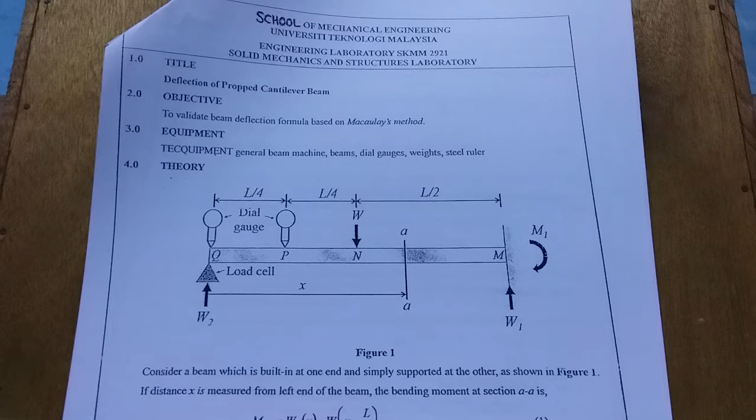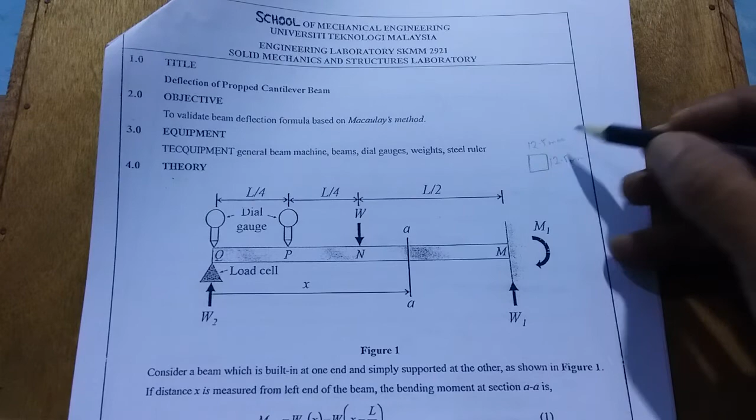Experiment equipment consists of the TecQuipment general beam machine. Beams, we have two beams to test. Beam number 1, aluminum beam, square shape bar, 12.5 mm multiply 12.5 mm. And beam number 2, stainless steel beam, rod shape, 12.5 mm diameter.

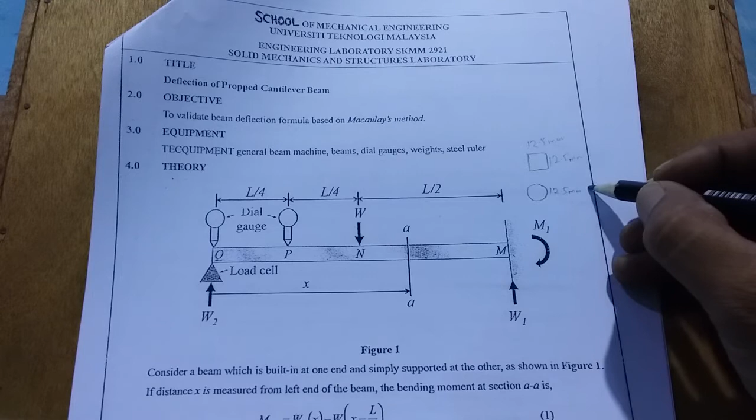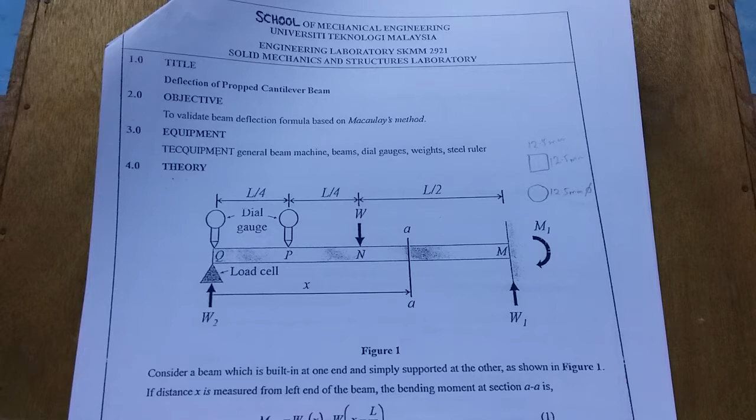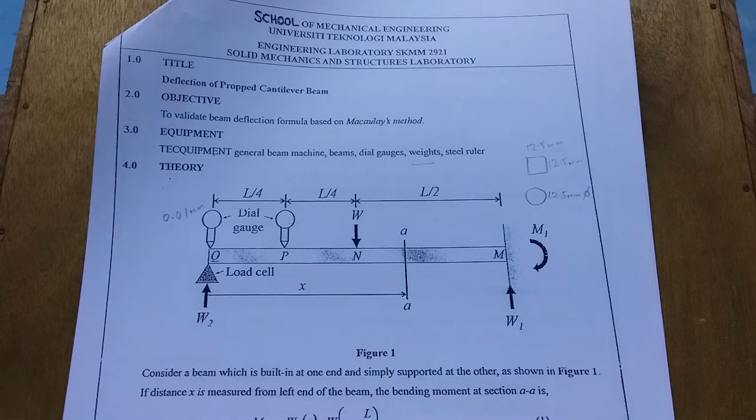Other equipment, dial gauge, two, at position Q and P. Each scale 0.01 mm. Weights, we have 5 units of weight. Each weight 200 gram. Steel ruler to measure distance L/2, L/4 and L/4. And W2 load cell, each scale 1/5 Newton.

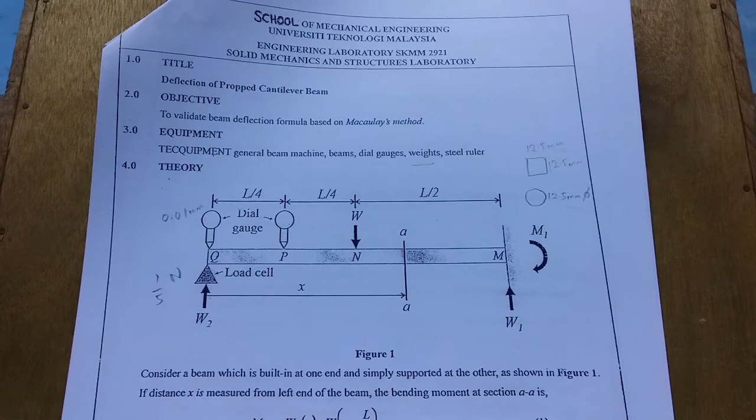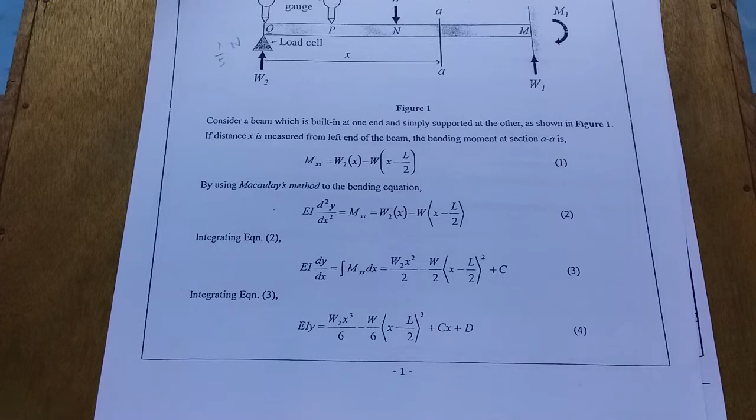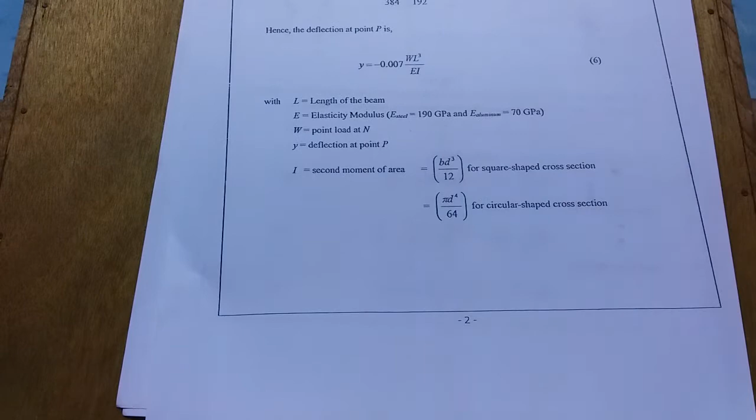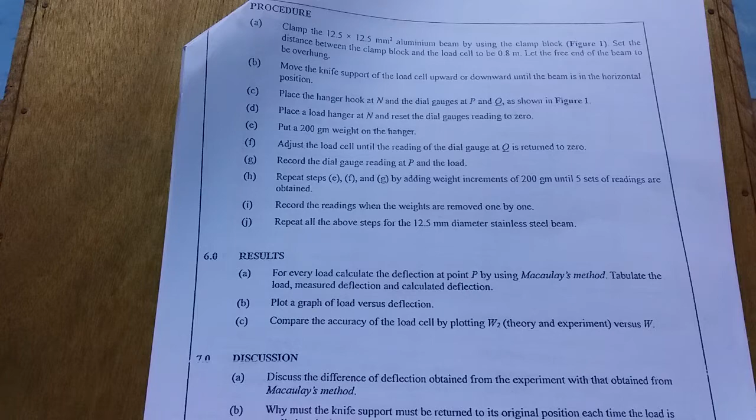The rest of this lab sheet at page 1 is calculation. Page number 2, calculation. Page 3, number 5, procedure, how to run the experiment step by step until finish. And number 6, 7 and 8, results, discussion and conclusion. You do it after the test is done.

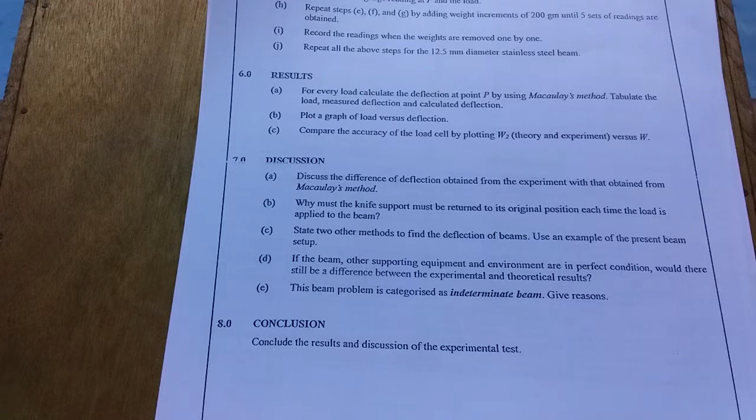Last page, table for the experiment of deflection of propped cantilever beam. Table number 1 for aluminum beam, 12.5 mm multiply 12.5 mm. And table number 2 for stainless steel beam, 12.5 mm diameter.

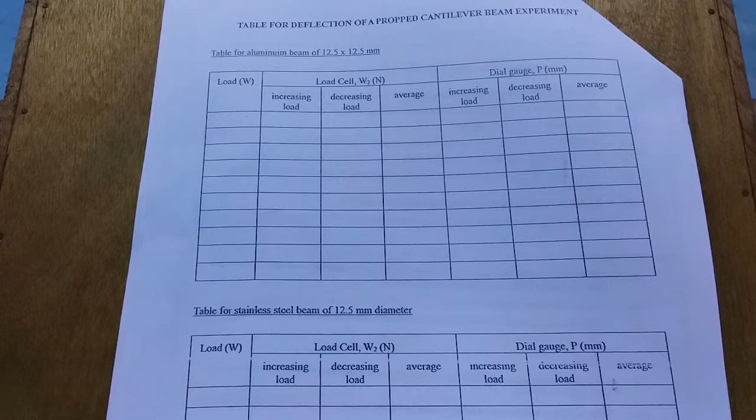This is the actual equipment of deflection of propped cantilever beam. This equipment consists of the TecQuipment general beam machine. Beams, we have a stainless steel beam, diameter 12.5, and then aluminum beam 12.5 multiply 12.5 mm. And then dial gauge, we have two. Weights, 5 units of weight, each weight 200 gram.

Steel ruler, okay, and others, load cell, this one W2 load cell, and then clamp hook, this one clamp hook, this one clamp block, then this one also clamp block, and then load hanger, this one load hanger. That's all for the equipment.

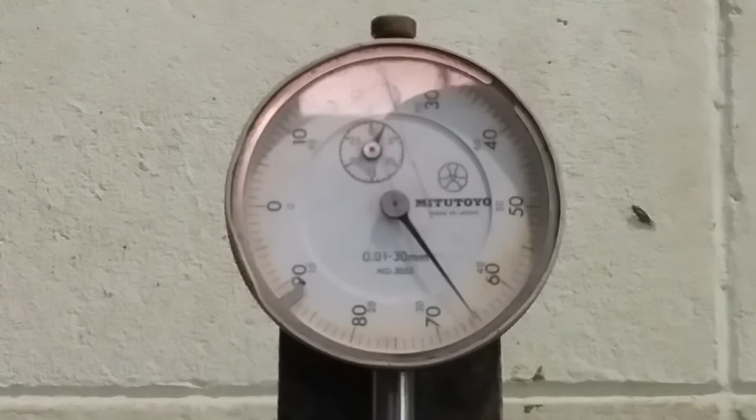Right now we learn how to read the dial gauge and load cell. Okay, dial gauge. This is the dial gauge. Dial gauge has two scales, big scale and small scale. In this experiment, our main focus is on the big scale. On the big scale, one scale equals 0.01 mm. Let's say our needle starts from 0.

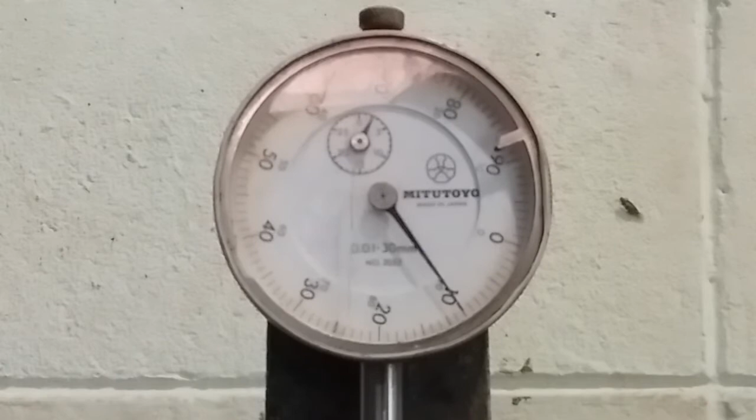Our needle starts from 0, and then it's measuring till 10. Means 10 scale. 10 scale, you are going to multiply 10 scale by 0.01. The actual reading for the dial gauge right now is 0.1 mm. 10 scale multiply 0.01 mm equal to 0.1 mm.

And now load cell W2. Load cell has a knife support and scale on the spindle. When you rotate this spindle anti-clockwise, the knife support will move upward, and if you rotate the spindle clockwise, the knife support will move downward. The purpose of the load cell is to bring back the aluminum beam to the original horizontal position, while at the same time it measures load.

Scale on the spindle, each scale equal to 1/5 Newton. Let's say the beam is already set to original position before adding weight, and the load cell scale starts from 5. After adding weight, we need to adjust the beam to the original position by rotating the spindle until the beam is in the horizontal position.

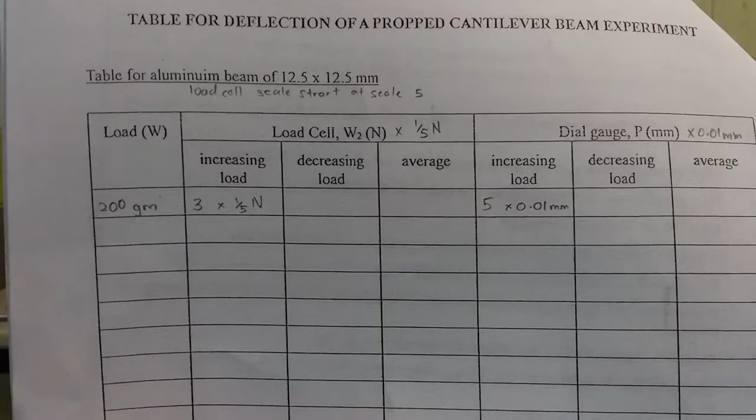On the lab sheet, write down all the data for the load cell and dial gauge. We continue to the next step.

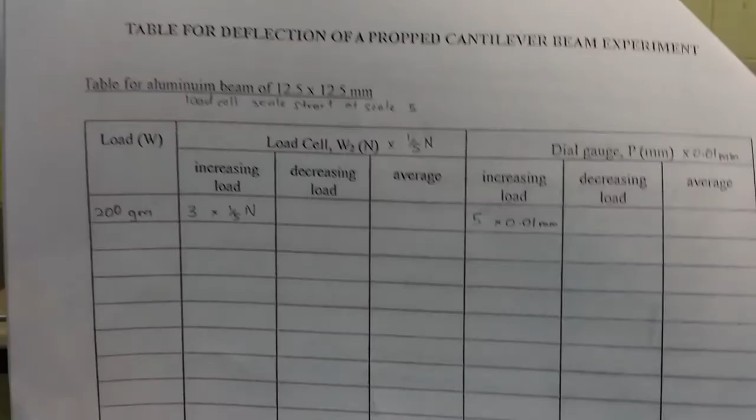Next step, H - before that, in step G we already recorded the dial gauge reading P and the load cell. Right now, step H: repeat steps E, F, and G by adding weight increments of 200 grams until 5 sets of readings are obtained. We run until 5 units.

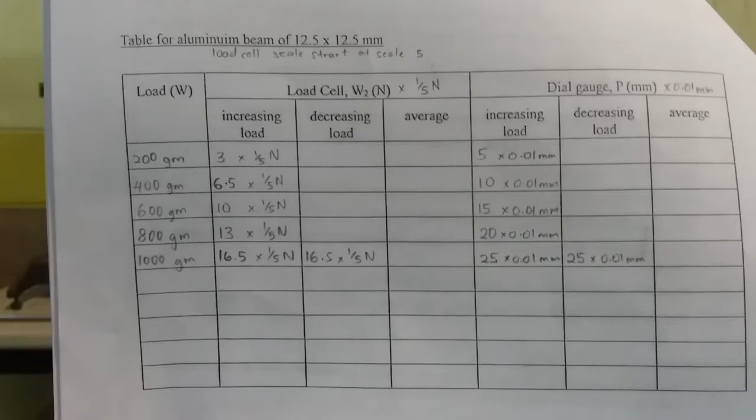This is the complete weight on the hanger and the final value for the maximum adding of weight. This is the adding data for this experiment.

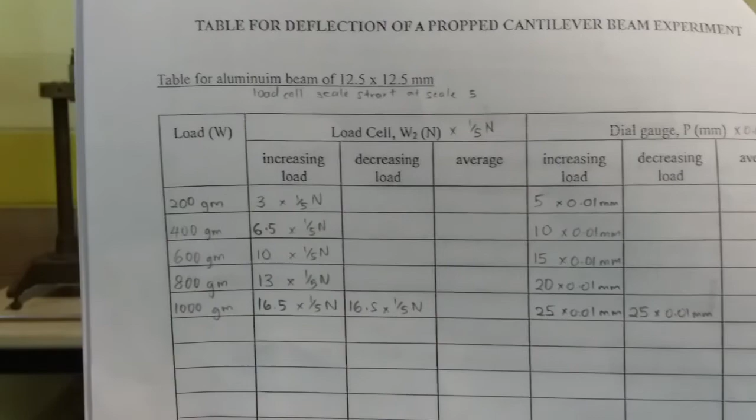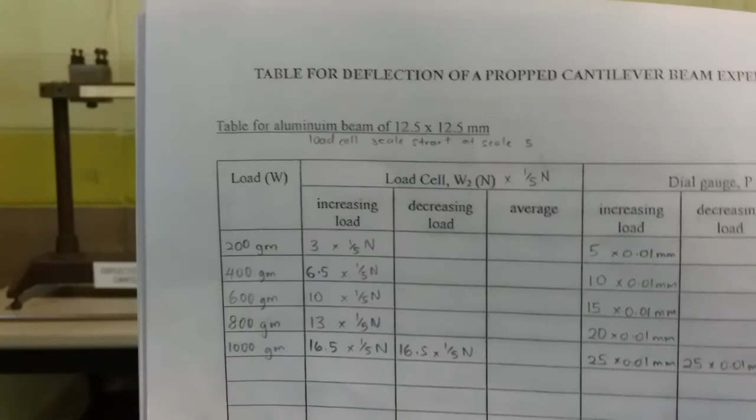After this, we need to remove the weights one by one. During removal one by one, we need to adjust the load cell to return the beam to the original position before we take any data. We remove them one by one.

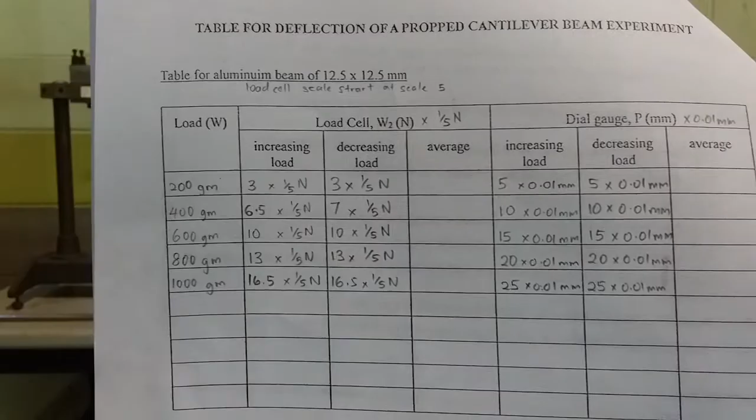We are done with the test of removing weights one by one. As mentioned in procedure I, we already recorded the reading when the weights were removed one by one. This is the data after removing one by one, the complete data for this experiment for the aluminum beam of 12.5 by 12.5 mm.

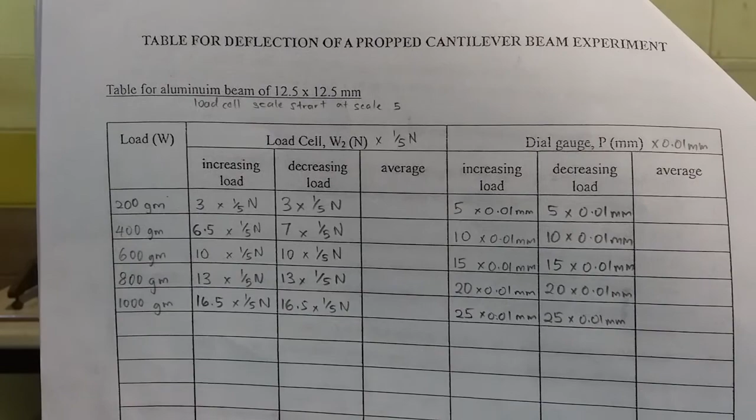Final step for this procedure, J: repeat all the above steps for the 12.5 mm diameter stainless steel beam. Yes, same setup for the stainless steel beam.

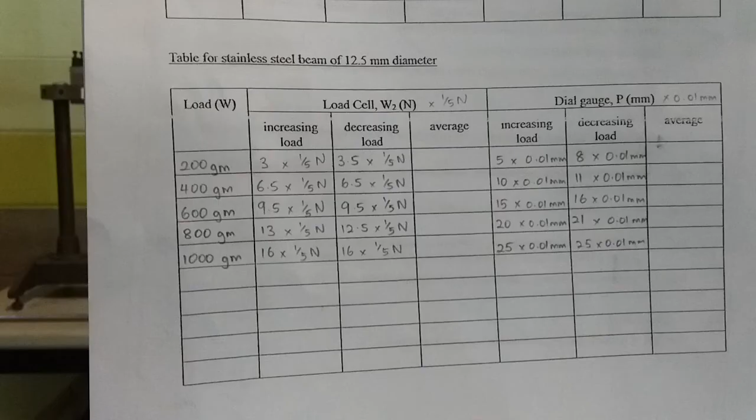I'm going to show you the data only. The steps are the same as for the aluminum beam. Right now, reading for the stainless steel beam of 12.5 mm diameter.

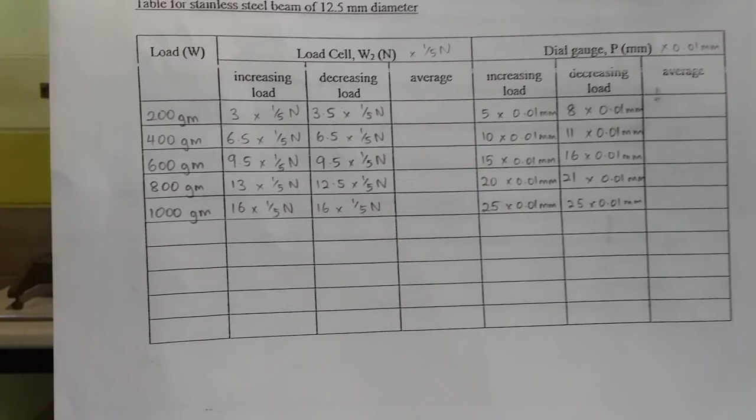That's all for our test on deflection of a propped cantilever beam. Thank you very much.